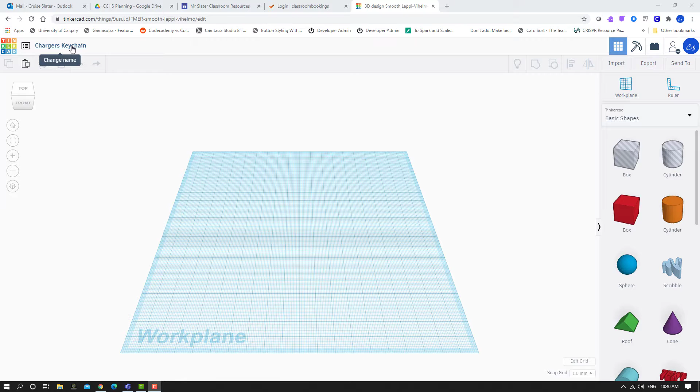Hey everyone, now that we have our Chargers logo in as an SVG file, we can go into TinkerCAD, open up a new design, and look at importing that file. So I've already renamed my file. You should get into the habit of renaming it every time. So I'm going to call this the Chargers keychain.

I'm going to go ahead and click on import, and it's going to ask me to choose a file. So I'll click choose a file, and I will import an image2vector SVG and hit open. It'll give you a little preview here. I'm happy with that. I'm going to hit import. It's going to come out really large actually. So maybe let's scale that down to, let's say 100 by 100. Keep things square.

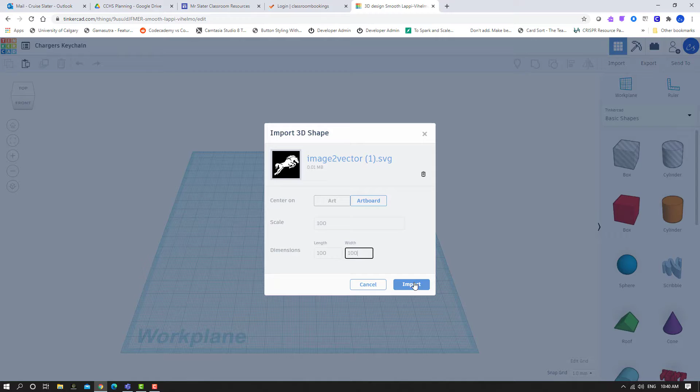So that's going to import it. It's going to put it here in the middle of my page. It may take a minute. That's okay. Remember, you're working on uploading a complex graphic into a website, and you can see that it has depth. Okay, so it's pretty cool. It almost looks like a cookie cutter. So you can imagine using this to cut out a cookie or something, or stamp some ink on paper. I'm not really sure there, but we're going to use this shape to build our keychain.

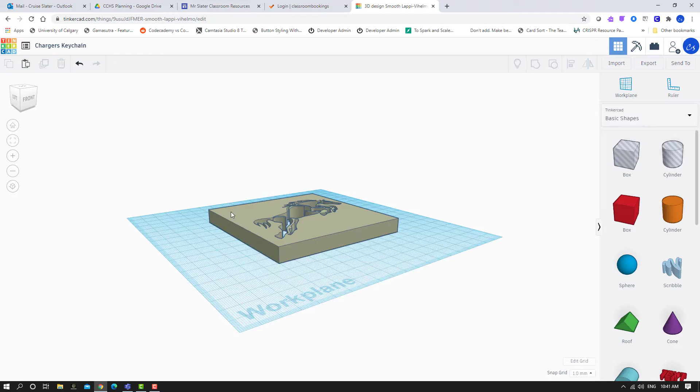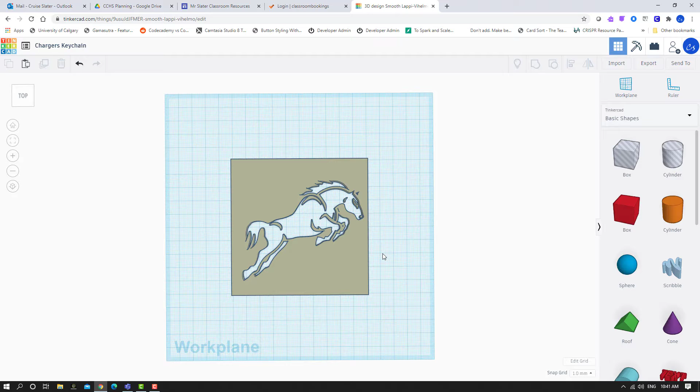So I'm happy with that. It's a little too thick, so I'm going to click on it, reduce its height. Maybe let's go down to 5. And I need to think, how am I going to connect this shape together? Because currently these little arcs here, the eyeball, this little piece here by the jaw, they're all separate. So if I print this, it'll all fall apart. So I need to connect it with some kind of backer. So I think the easiest way to do this is going to be to use a box.

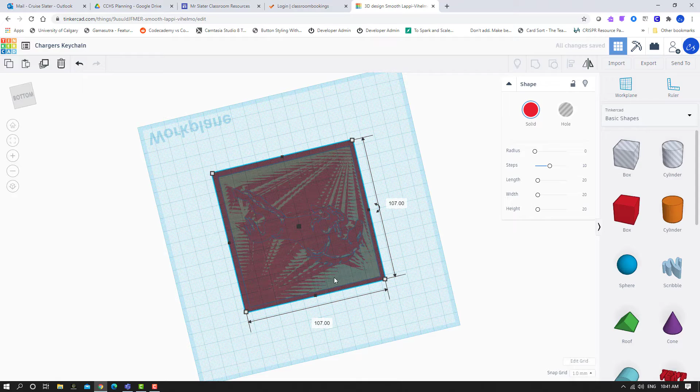So I'm going to take out a box here. I'm going to line it up with the sides. You're going to be a little more accurate with this than I am. But I'm going to drag it out, make it a little bit bigger. I'm going to look from the bottom view, just try to get things equal on all sides. We can see that the red and gray are Z fighting. We're getting this weird sort of flashing. That means those two objects exist on the same plane. Okay, so let's actually go back up.

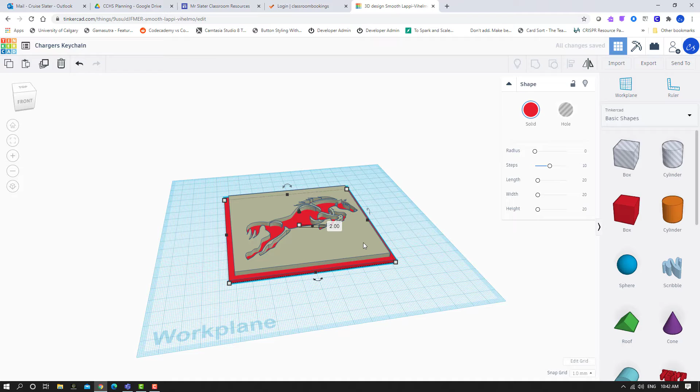My horse is at 5, so let's scale this down to 6 or 7. Let's go with 7. And I actually want the other shape, so let's actually go down a little bit to 4. I'm reducing the height of the red box so I can grab this shape really quick. So let's grab that shape. Let's use the black arrow and raise it up in the air really quick so we can set our true shape dimension. So let's go back up to a height of 7. So that's not bad for the thickness of my keychain.

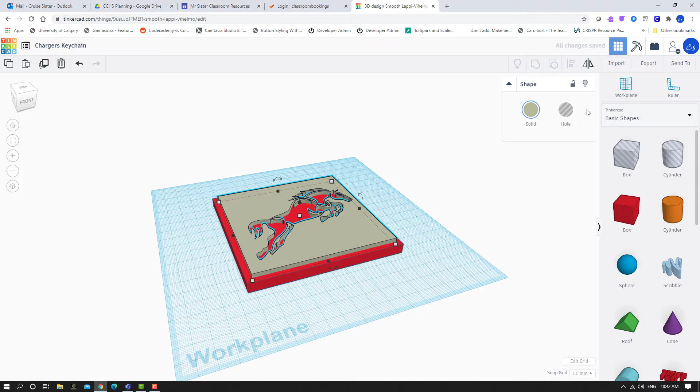I'm going to drop this back down. I'm going to have it so that it just sort of hits into the red a little bit, but still stands up. I'm going to convert it to a hole shape. And let's see what happens if I group this. Let's just see, how does it look? I think it's going to look pretty cool. And I'm happy with that. Okay, I can see that the horse is cut out. So I've actually used my shape to invert my design.

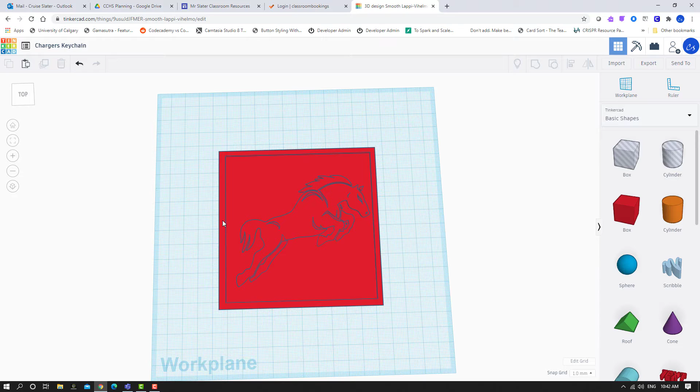And rather than having something cut out, it looks like it has embossed. And I'm actually happy with the way it looks and happy with the edging. So I guess the only piece left on my keychain is to drag out something for my keychain to attach to. So let's line up a cylinder here on the side. I would say probably between, I don't know, because I'm dealing with a larger shape, let's go with 10 by 10. Okay, so I'm just going to get it approximate here.

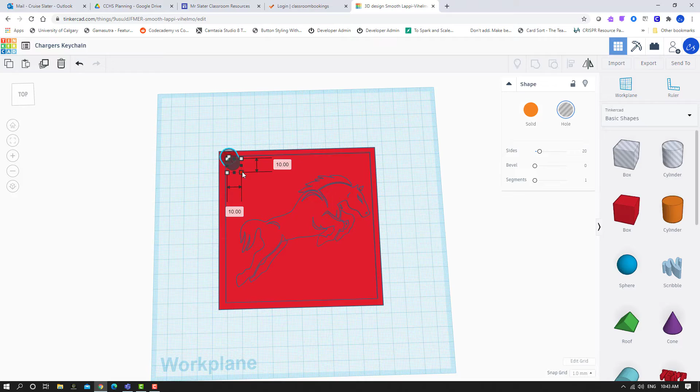There we go. A good hint here is to look at it from the side and drop this cylinder so that it just showcases right through. That way you know you're going to get a solid cut right through the shape. And I've changed my mind a little bit there. I don't like it being right on the edge. So with my shape selected, I'm going to use my arrow keys and just 2 up, 2 over, and that'll move the thing a little further in from the edge. Okay, so I like that.

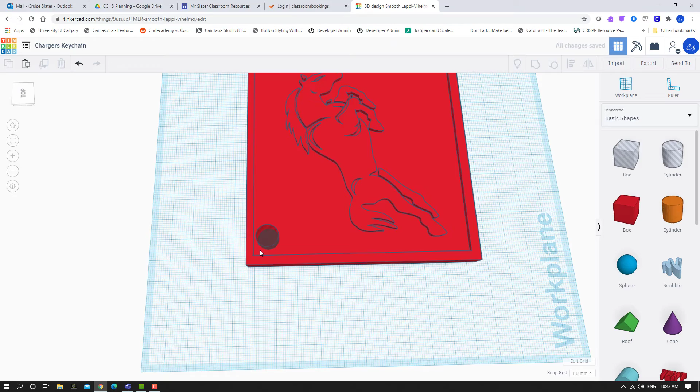And I'm trying to think, what else could I do? Maybe I want to have my name here. So I'm going to drag out the text, and I'm going to put it right in the middle maybe. I sort of like that there. I'm going to change the text to Slater, so S-L-A-T-E-R. And it's a little bit too big, so let's shrink it down.

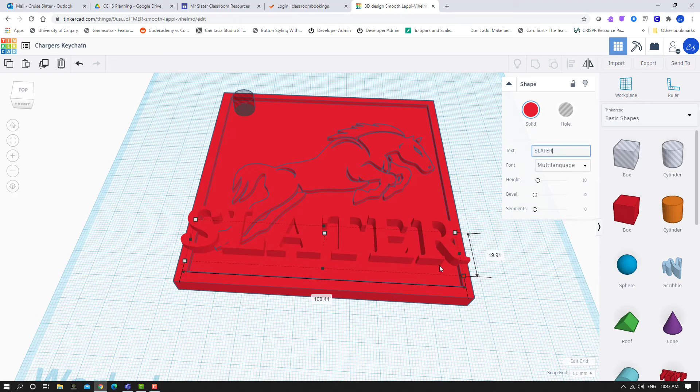And it might be cool actually to have this sort of punch through, or actually maybe not even punch through, but just punch through lower than the embossing. So let's lower this a little bit. Let's change it to a hole type, and let's select everything and group it and see how that turns out. I think I'm going to like the way this looks. So the hole definitely worked in the top.

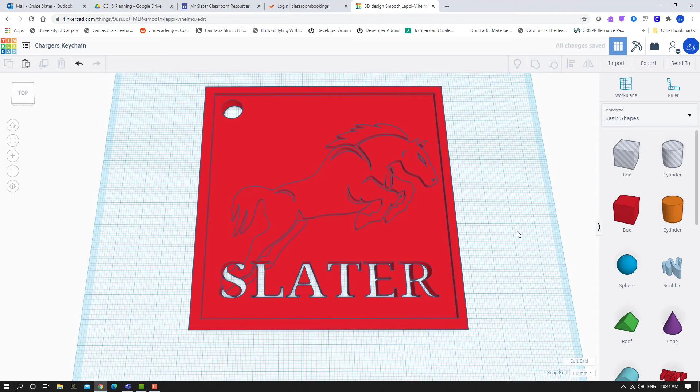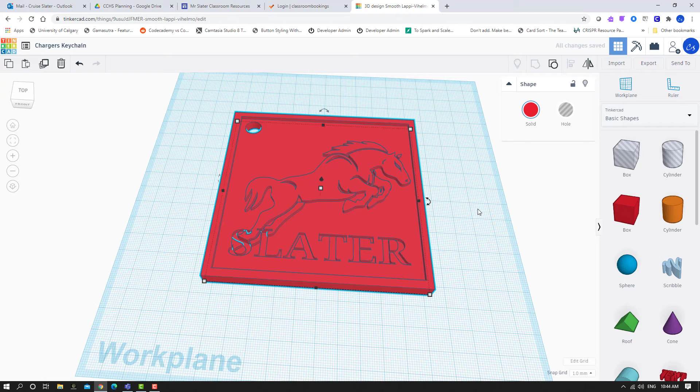I don't like the way my name turned out, so let's hit Control Z. Let's not go so low, I think, with the text. I think that was too low. So let's not cut right through the shape. Let's go from the side profile, raise it up, maybe go to half height. Let's try that. Let's group everything, group it again. And this is going to be a process for you. As you design, you're going to figure out what do you like, what do you not like.

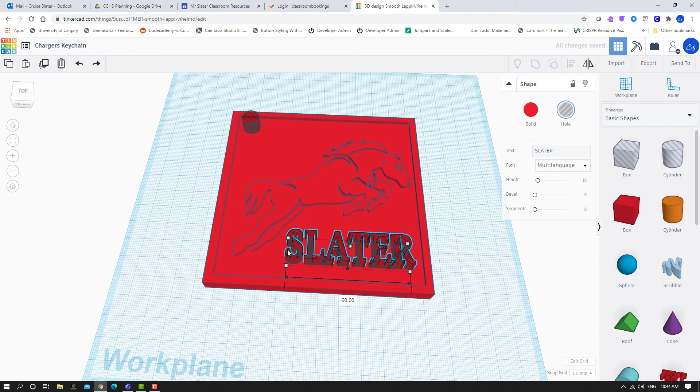And I'm quite happy with that. I think I like the look of it. It's kind of cool how the L and the S cut in and the horse stays above. Something that might make it look a little bit better, a little less confusing, is to shrink my name. So I could Control Z, undo that. I could shrink the width of my name, maybe to something like that. Group it together, and I think I'll be happy with this final design iteration. And I am. I really like the way that looks.

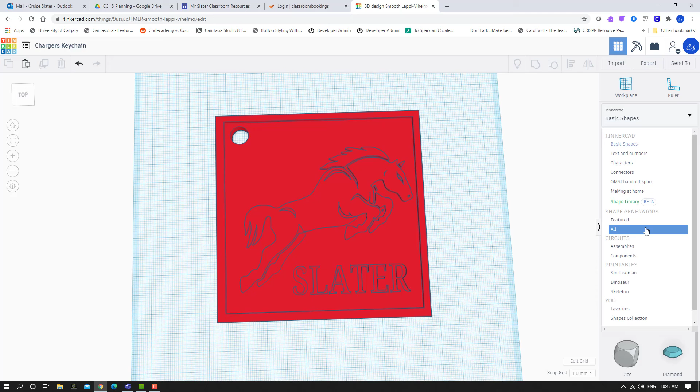So we have a hole for our keychain. We have a logo based on our image that we either got on the internet or drew, and I have my name on it. So go ahead, design your own keychain. Have some fun with it. There's a bunch of different shapes in here. You can go into all shapes to find more, cursive text, different shapes, butterfly wings. There's all kinds of stuff in here. So don't be limited. Have some fun, design something interesting, and we'll get it on the 3D printer as soon as possible.